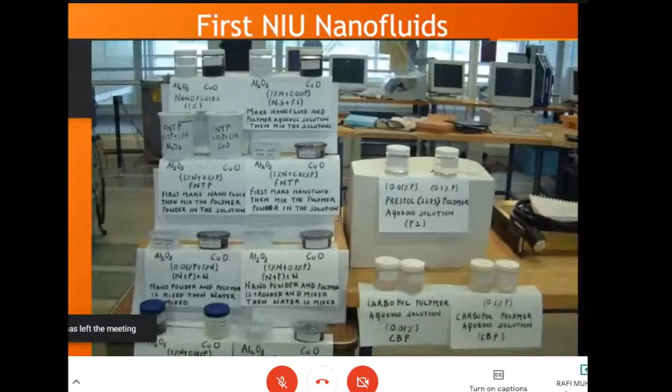This is what we are going to predict in subsequent slides. Initially we started introducing Al2O3 with copper oxides, then we started using silver particles, and later we are using Al2O3 with water, or copper oxide, or silver particles too.

But because of the existence of carbon nanoparticles, it is also mandatory to investigate the nanostructures, whether they behave differently, indifferently, favorably or detrimentally, favoring all thermophysical and thermochemical properties, if you are in a position to use advanced experimental techniques like gas chromatography and other flow visualization methods.

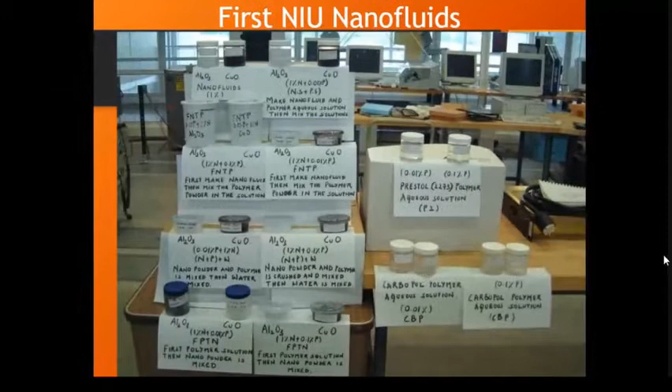If you are relying on knowledge-based expert systems using StarCD or advanced versions of StarCD CFD software, coupled with ES-ICE and ES-Aero, there is a basic prediction that we are always interested in predicting incompressible flow to some extent.

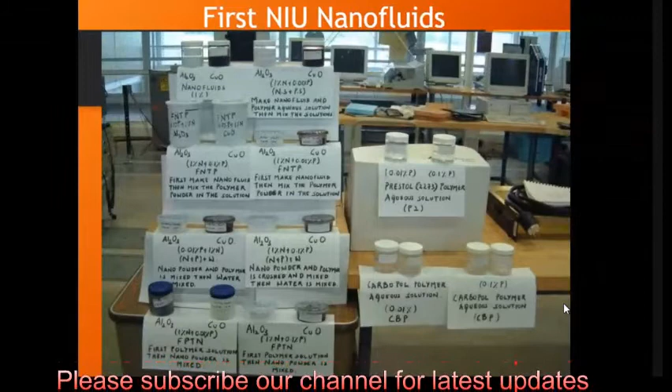But whenever we are talking about fluids, naturally, up to some extent, we are also in a position to rely on features under fluid dynamic simulation of compressible fluid structures also, because of the cycle-to-cycle variation in all the minimal stages when mixing it, as well as with respect to a small void percentage or volume fraction in which we introduce the enhancement of heat transfer through thermophysical and thermochemical properties.

So this is the background in which we are always looking for enhancement of heat transfer for cooling applications. For example, thermochemical and thermophysical changes required to accumulate certain features of intention towards thermal engineering of electronic cooling of electronic equipment, it plays a vital role as far as nanofluids are concerned.

As far as the present scenario is concerned, globally speaking, the trends towards using carbon nanotubes and nanofluids for heat transfer and fluid flow structures are totally deviated by using hybrid nanofluids, as well as empirical oriented, system oriented, material oriented, or phase oriented hybrid nanofluid structures, which are favoring the basic enhancement of the

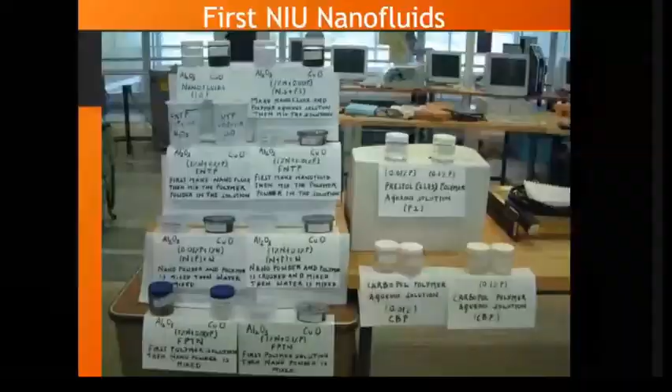To start with the technologies involved in nanofluids, we have two different technologies: one is dry nanotechnology and the other is wet nanotechnology. Since gases and fluids are considered different forms of fluids, naturally we mix them with solids, either through nature on its own, because of natural phenomena ensuring sustainable development towards ecological dynamics and ecological factors.

This also involves chemical and biochemical changes in terms of biomechanical processing and microelectromechanical systems through industrial advancements. One flexible advantage of these nanotechnologies is that we can implement more degrees of freedom with more opportunities. But whenever we look for more opportunities with nanofluids, we also need to look at the more challenges involved.

Basically, nanofluids comprise nanoparticles in base fluids, which help us understand nanoscale particle-fluid interactions in physical, chemical, thermal, thermophysical, thermochemical, and biomechanical processes, and to some extent engineering applied mechanics, as far as material behavior patterns are concerned in terms of creep, stress, and fatigue, using CFD software along with SolidWorks or ANSYS latest versions.

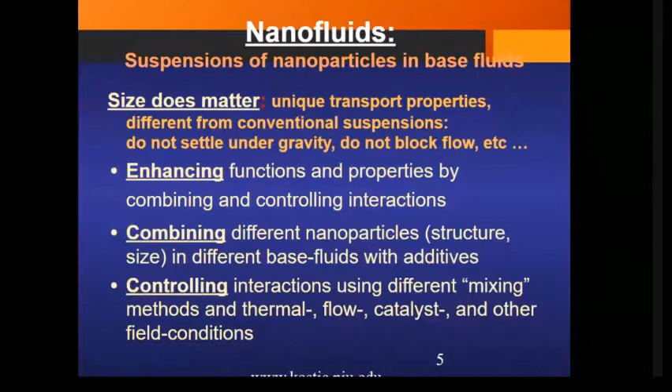finally we are also in a position to control the interactions using different mixing methods and thermal flow structure, and again by using different types of flow conditions too in the field.

So now let us have a basic look on the applications of nanofluids, advanced as well as hybrid nanofluids. Heat transfer of nanofluids in the tribological area, then coating, then chemical processing industries, then pharmaceutical industries, drug delivery systems, telemedicine industry, then extraction of nanofluid-based industries, then environmental pollution.

As far as the present scenario is concerned, at multinational level, they started originating their march fast towards the ecological dynamics and sustainable developments too, because of the existence of using the advanced nanofluid structure in hybrid form.

In the biochemical and biomechanical industries, for example, Biocon is one of the Indian-based multinational companies introducing wireless sensor development and communication solutions for mobile applications.

With respect to different apps, we download many advanced materials embedded in laptops or intelligent computers, mobiles, or other advanced computational facilities, including supercomputers.

Finally, we have application-oriented medical telemedicine, drug delivery, and functional tissue-cell interactions, including cryosurgical aspects. As far as present medical scenarios go, nanofluids are significant.

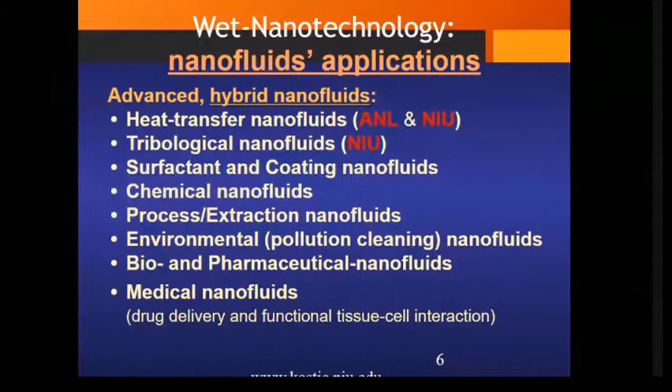It is also associated with basic structures for introducing hybrid nanofluids used in surface-level coating structures. This is what we are trying to convey as far as the basic applications are concerned.

Now, looking at the development of advanced hybrid nanofluids, it is polymeric based—polymer nanofluids, and drag reduction nanofluids, DR nanofluids. So there are two different basic as well as advanced levels of hybrid nanofluids: polymer nanofluids and drag reduction nanofluids.

Development of heat transfer nanofluids normally involves collaboration with many international forums, and many proposals have already been proposed. My experience with the Ethiopian Ministry of Education related to nanofluids is plenty, in terms of polymeric based nanofluids using polymer matrix materials.

PMC withstands very high temperatures. So instead of using metal matrix composites (MMC), we can always go for PMC for basic nanofluid applications requiring high temperature resistance.

Now let us see some of the background. There is a need for advanced prediction of flow, heat transfer fluids, and other critical applications, since it originates from a different blend of different properties.

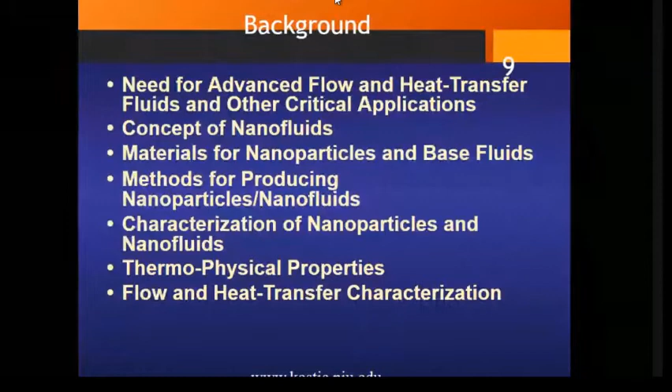As far as flow and heat transfer characterization is concerned, we deal with incompressible, compressible, with heat generation, without heat generation, steady and unsteady conditions, with respect to isotropic and polymorphism-oriented prediction of all structures.

Now let us look at the challenges. Heat rejection requirements are continually increasing due to the trend towards rapid speeds and smaller features for microelectronic devices. Microelectromechanical systems are rapidly developing in optoelectronics as well as microelectronics to predict optical characteristics.

So if you look at any material, basically three different characterizations evolve from the basic characterization. Out of these characteristics, properties like physical, chemical, and thermal properties can be predicted by using basic experimentation.

But if you look at the advanced level of fluid flow structures, including compressible flow structures, as well as the advanced combination mode of conduction and convection, with respect to nominal changes and very minor or less size of particles, it's very difficult to design microelectronic devices.

These devices are already embedded in all computational equipment like laptops, mobiles, and supercomputing equipment. So the cooling process is considered mandatory, and top priority is given to cooling in thermal management of electronic equipment.

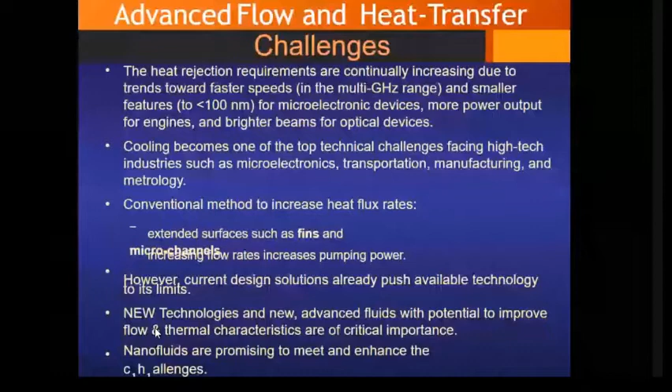New technologies are embedded with machine learning and artificial intelligence for code coupling with respect to basic software. So if you have basic predictions with respect to the concept of nanofluids in terms of predicting the heat transfer of fluids.

Many researchers have come out with miniaturization technologies, but it is predicted that conventional fluids with millimeter or micrometer sized particles do not work with emerging recent trend technologies because they can clog the tiny channels of these devices. So clogging is one of the major difficulties when using microchannels and heat pipes.

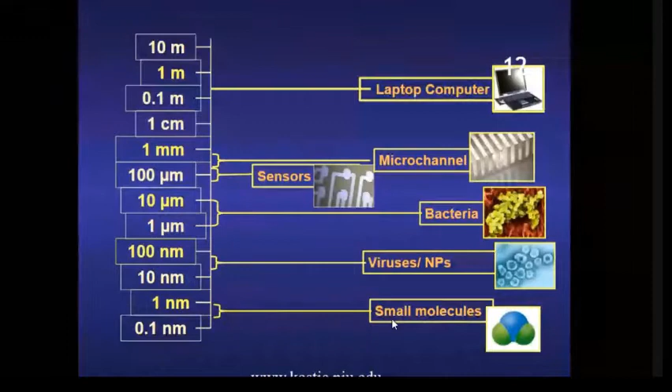Let's have a look at the basic applications for sizing nanoparticles in different sizes. For example, for laptops and computers, the recommended particle size is 10 meter, 1 meter, 0.1 meter, then 1 centimeter too.

For microchannels, the recommended size is relevant because microchannels are always embedded with sensors for actuation purposes in terms of microelectromechanical systems and auto infotronics.

Whenever we talk about sensor development for networking and routing, for communication as well as computer vision techniques, we also have a cluster of nanoparticle sizes like 1 millimeter, 100 micrometer, 10 micrometer, and 1 micrometer. We can relate these sensor ranges to bacteria too, for 10 micrometer and 1 micrometer. For virus, it deals with 100 nanometer and 10 nanometer, and for small molecules, we have 1 nanometer and 0.1 nanometer.

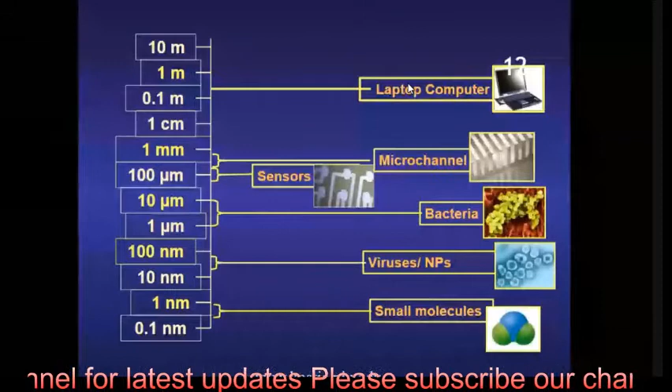So from where the N starts, from 100 nm, 10 nm, 1 nm, and 0.1 nm. We must be conscious enough to have a recommended size of nanoparticles in different recommendable forms, along with the nominal percentage of basic fluid flow, basic base fluid combination.

Now let us see what are the reasons to use the nanoparticles. The basic concept of mixing the solid particles in fluid is for enhancing the thermal conductivity, and it can be traced back to Maxwell in the 19th century. After that we started coupling the suspensions with a very nominal percentage, so that we are able to cling on the critical heat flux in terms of convection.

As far as advanced level of hybrid nanofluids are concerned, the rate of exhibiting advanced heat transfer enhancement is only based on free or forced convection more than 75 percentage, and less than 25 percentage we can cling on the combination mode of conduction heat transfer, again by assuming that it is predicted only in X or Y alone, or X and Y only up to some extent.

For if you have a code coupling with different methods, forward difference and backward difference, as well as the process of CFD is concerned.

So automatically, nanofluids are basically exhibiting fluid flow structures and advancements of heat transfer. Naturally, characterization of materials is mandatory as far as fluid dynamic simulation studies of the basic nanofluid structures are concerned, starting from the first level to the last level. So stage 1 is talking about defining the problem with suitable boundary conditions.

Dirichlet or the combinational mode of Neumann condition can also be coupled with defining the problem, and for nanofluids and advancement of heat transfer is concerned, especially.

Secondly, as far as processing stages are concerned, we can very well go ahead with nanofluid CFD analysis with the help of finite difference method for pure prediction of temperature or heat transfer alone, by using forward difference, backward difference, and central difference, to a particular application, up to some extent.

Secondly, we can use for both predicting the fluid flow structures as well as the heat transfer aspects, the finite volume method. It is a combination of both, taking care of the changes in fluid flow structures, incompressible and compressible, as well as the combination of conduction and convection mode. So by using finite volume method, the processing stage will be easier.

Then again, if any particulate matter or particle structures are very difficult to identify in terms of the basic terminologies of thermophysical, thermochemical, thermomechanical, and thermo processing related parameters, then you can go for the finite particle method. This is one of the recent trends in which you can extend even CFD analysis to many structures.

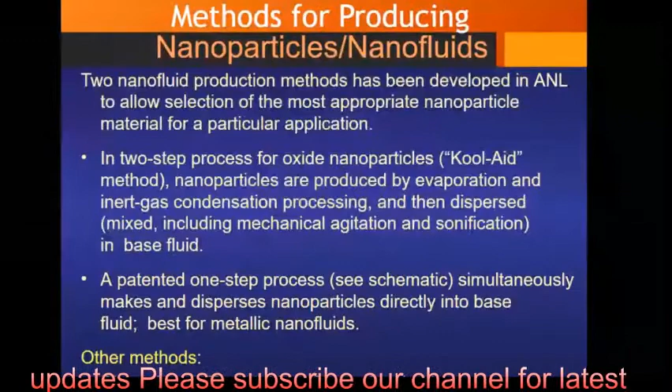Since we are having the dispersion rate, it is very essential to have the prediction of mixing ability towards prediction of the deformational capabilities of the material characterization for sustainable development, which favors the thermochemical and thermophysical behaviors in the preliminary stage for monitoring and controlling the system.

But for executing and prediction, we need to look more into thermomechanical and thermo-optical issues too, because optical characteristics relate to miniaturization, as electronic components are not like mechanical components which are comparatively huge in size. Electronic components are minimal in size due to advanced microchannels, heat pipes, sensors and actuators embedded in auto infotronic systems, from costlier automotive vehicles and aircraft like the 737 MAX and Airbus, to advanced aerodynamic structures and miniaturized components used in satellite communications, rocket engines, space applications and shuttles.

So probably we are looking for the processing advancements in one stage, manufacturing difficulties on the other side, characterization probabilities on a third side, and finally we are going to have a look on the optimization in the other stage.

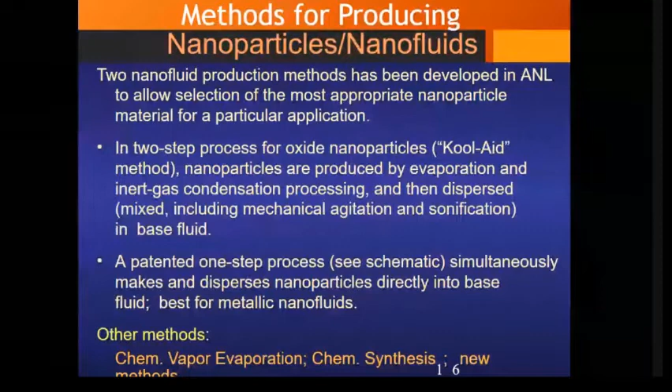So whenever we are talking about the advancements of nanofluids in terms of fluid structures, we need to look at what capabilities need to be embedded, performed, adjusted, or supported with advancements in technologies coupled with basic software and advanced code coupling, to measure it, monitor it, control it, and optimize it.

As well as to propagate the fluctuations as instantaneous changes in velocities - in x direction as u plus u prime, in y direction as v plus v prime, and in z direction as w plus w prime, in all the modulus - so that the code coupling process will be easier for nanofluid CFD and fluid dynamic simulation studies.

So two-step approach processes are very essential for code coupling with CFD as far as nanofluidic structures are concerned, whereas we can always go ahead with one-step process, simultaneously making and dispersing the nanoparticles directly into the base fluid, so that you can have direct contact for predicting the metallic nanofluids.

But bimetallic behavior, because of the existence of covalent bonds and other chemical kinetic structures too, makes it also very essential to have the dissociation of the particles.

So equipartition of energy, mean free path, and root mean square velocity - all these statistical behaviors of the statistical approach of basic thermodynamic analysis - can also be looked into as far as CFD analysis of nanofluid structures are concerned.

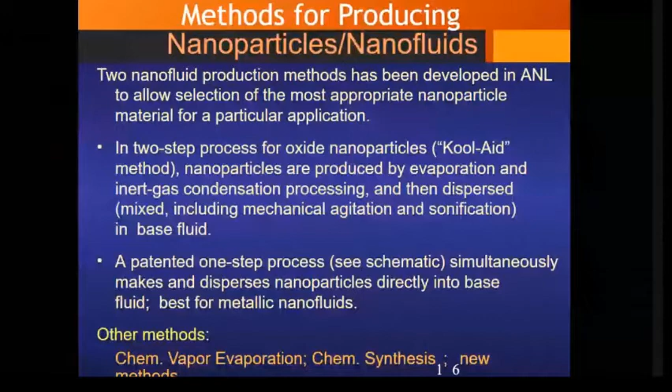And if we have a look at the basic methods, we have chemical vapor evaporation and chemical synthesis. We can go ahead measuring the chemical properties as well as thermal properties too, and we can have idealized as well as real synthesis by introducing new flow visualization methods.

But if you look at the basic terminologies, or the combination of both incompressible and compressible flow structures, we are also in a position to look at aerodynamic structures in terms of different types of turbulence motions like eddies at the large level, higher order level, swirl, squish, tumble, and blow-by, also in the reciprocation motion.

And as far as any chamber - cryo chamber or any fluidic chamber - is concerned, in terms of introducing the nanofluid structure, which is already associated with embedding the molecules in terms of evaporation or condensation, either for heat transfer enhancement for cooling 90%, or it can also be extended for different types of structures.

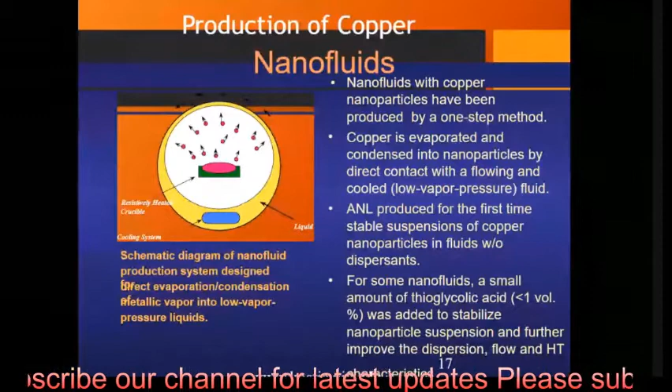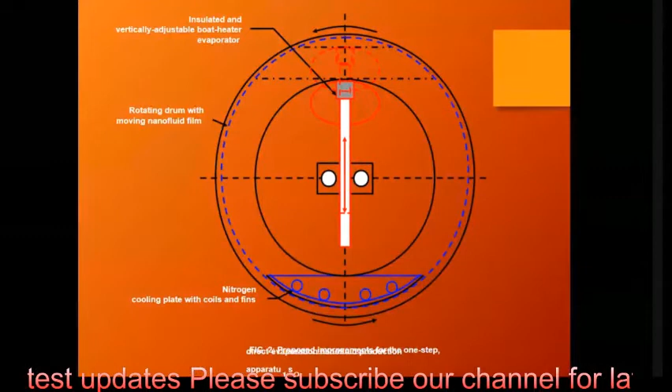Because of the chemical vapor deposition and the fluid structure of turbulence motions, there is a possibility for the formation of heterogeneous mixtures, so we can have complicated structures of compressible flow in terms of eddies and swirl normally—maybe 50% larger eddies and smaller eddies, along with the structure of swirl. And again, we can have a code coupling with the enhancement of convection heat transfer too.

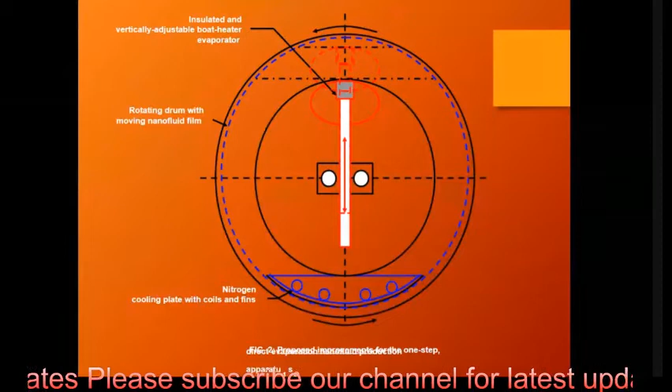As far as heat transfer aspects are concerned, normally conduction mode of heat transfer doesn't require any mediative transfer of heat, since we have direct contact with the solid structure. So we assume heat is transferred through only one direction alone, even though it is happening at three different directions for a multi-directional case.

But still, we need to look at the assumption that we are going to have a critical flux toward only one direction. And since we are going to have nanofluidic structures, as far as convection mode of heat transfer is concerned, we need to assume a medium to transfer the heat, either water or any other fluidic medium—probably because of the existence of the nanoparticles.

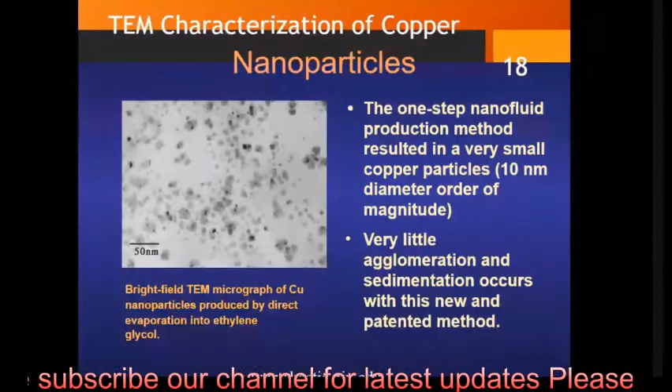And if you look at the dispersion experiment, it shows that a stable suspension of oxide and metallic nanoparticles can be achieved in common basic fluids too.

Next is multi-walled carbon nanotubes in oil. Multi-walled nanotubes were produced in a chemical vapor deposition reactor with xylene as the primary carbon source and ferrocene to provide the catalyst for ionic configuration, ensuring the metallic bonds. It has a mean diameter of approximately 25 nanometers and a length of approximately 50 micrometers, contained in an average of

30 annular layers. As far as layering structures with respect to polymeric corrugated structures are concerned, we need to look at the gravitational studies too, as far as the fluid structures are concerned.

Then nanotube in synthetic oil—nanofluids were produced by a simple one-step method as far as conventional usage is concerned. So stable fluids with carbon nanotubes enhance the thermal conductivity, promising the critical heat transfer.

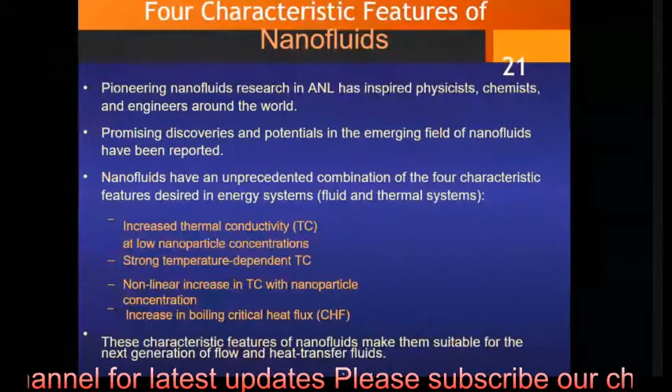That is copper nanoparticles coated with thioglycolic acid.

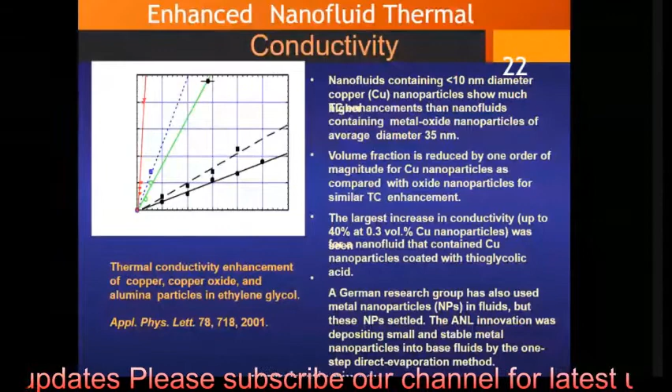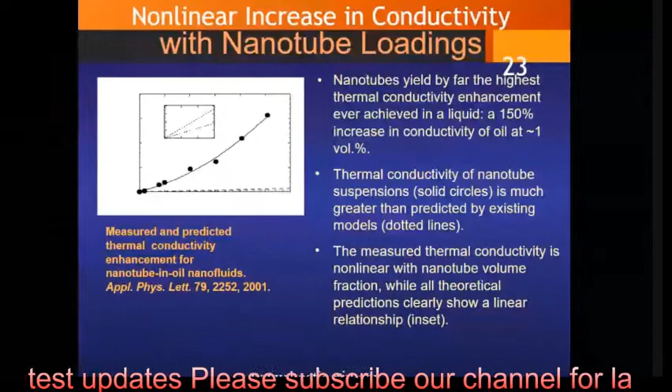So again, we need confinement with proper agreement in predicting the basic fluid structures and boundary conditions, like dynamic or kinematic viscosities. Because of the different fluid structures of oil, it is essential to look at other predictions of fluid properties too, in terms of fixing or ensuring dynamic and kinematic viscosity.

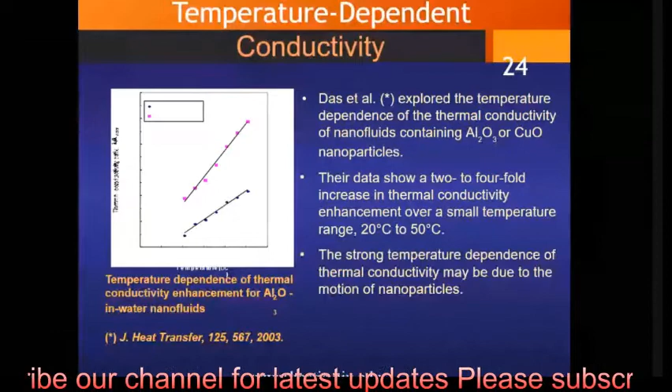The next one is temperature dependent conductivity. It is predicted that the strong temperature dependence of thermal conductivity may be due to the motion of nanoparticles. So a statistical approach of thermodynamic movement of molecules is required as far as these nanofluidic structures are concerned.

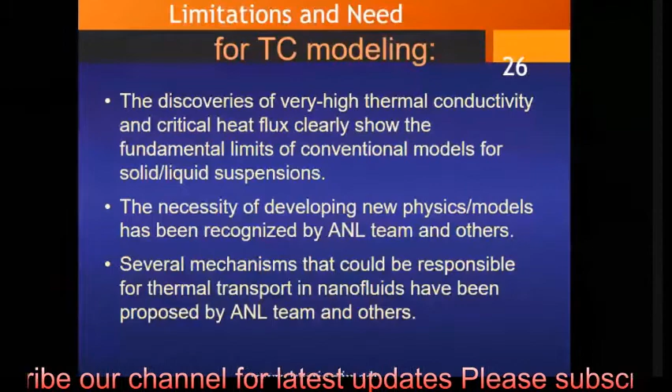Then, limitations and need: the discoveries of very high thermal conductivity and CHF clearly show the fundamental limits of conventional models of solid-liquid suspensions. Therefore, there is a necessity for developing new physics or models recognized by research and development teams globally. Several mechanisms could be responsible for thermal transport in nanofluids, which have been proposed by research teams, and can be predicted in futuristic aspects too.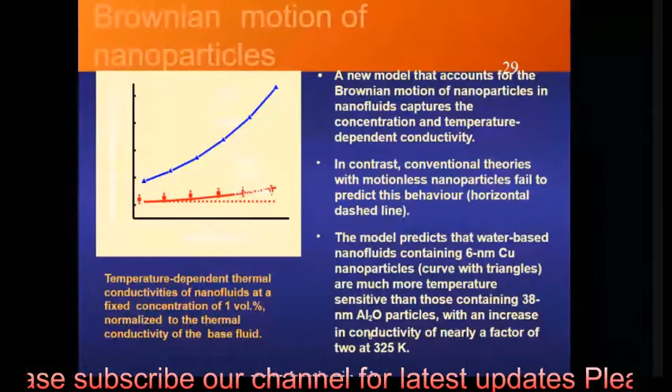The next one is talking about Brownian motion of nanoparticles. A new model that accounts for Brownian motion of nanoparticles in nanofluid represents the concentration and temperature dependent conductivity. This model predicts that water-based nanofluids containing 6 nanometer copper nanoparticles, the curve with triangles, are much more temperature sensitive than those containing 38 nanometer Al2O3 particles, with an increase in conductivity of nearly a factor of 2 at 325 Kelvin.

There's a toughest challenge facing industries like microelectronics, automobiles, and manufacturing sectors, as far as thermal losses are concerned, because we are not able to transfer heat efficiently for cooling systems, especially for electronic supercomputing facilities, electronic equipment, and computer devices. So recent developments in nanotechnology bring out a new heat transfer coolant called nanofluids.

Then preparation of nanofluid: nanoparticles are produced from several methods, we have already discussed the two-step method. It is widely used for preparing nanofluids. Surfactants are substances used to enhance the stability of nanoparticles in the fluid.

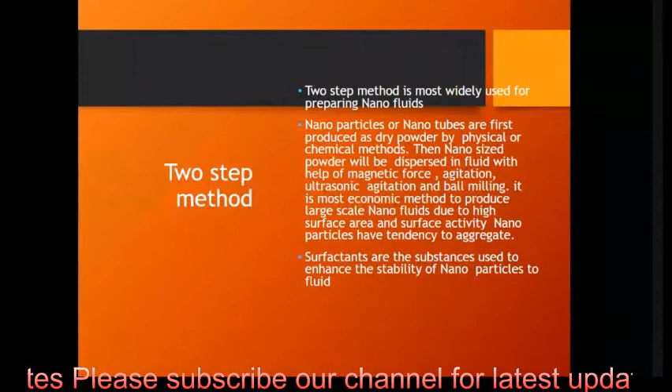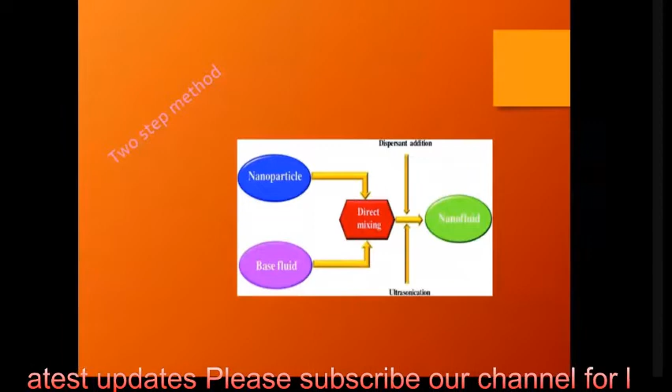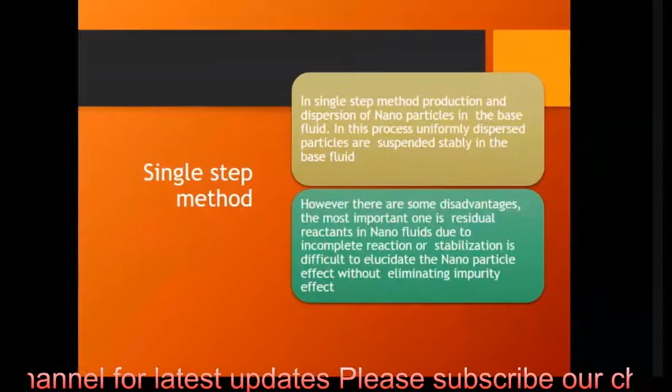In the case of the two-step method, we mix the nanoparticle with the base fluid through direct mixing, with dispersant addition to the basic nanofluids. In the case of the single-step method, it's production and dispersion of nanoparticles in the base fluid directly. In this process, uniformly dispersed particles are suspended predominantly and stably in the base fluid.

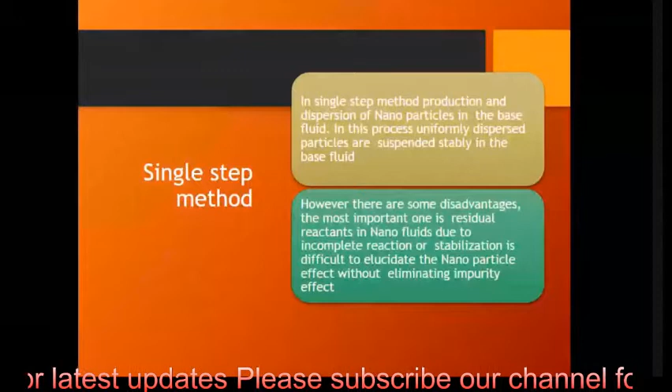In more systems, this is very essential. The residual reactants in nanofluids may result in incomplete reaction, or stabilization is difficult to elucidate the nanoparticle effects without eliminating the impurity effects. That is a drawback of the single-step method.

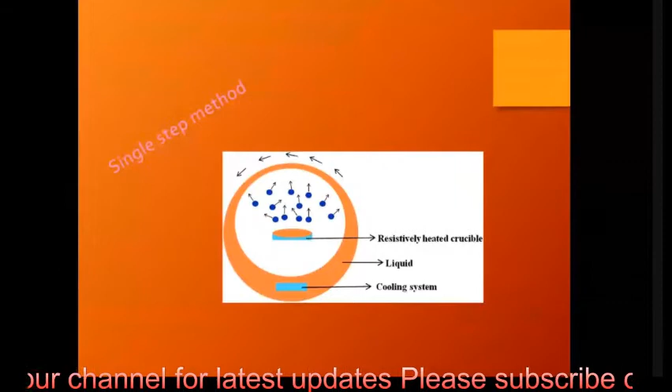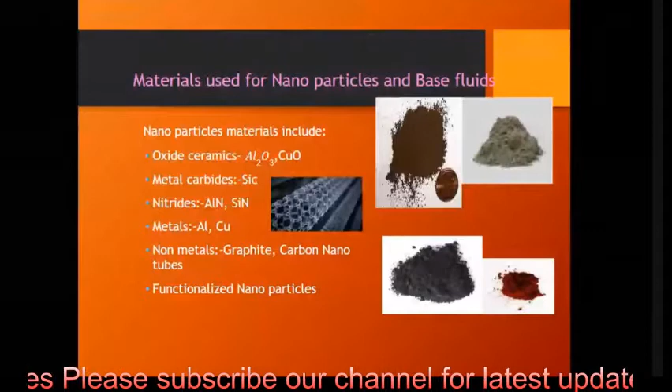There are some basic nanomaterials used for nanoparticles with the base fluid: oxides and ceramics, such as Al2O3 and copper oxide, then metal carbides like silicon carbide, nitrides, metals, non-metals, and functionalized nanoparticles. Base fluids include water, ethylene glycol, triethylene glycol, and other coolants, oils and lubricants, biofluids including cellulose, enzymes, and hormones, used to some extent as a body fluidic structure for telemedicine and surgical applications, especially in advanced cryosurgery. Then polymer solutions and other common fluids too.

There are some advanced flow and heat transfer challenges. Heat rejection requirements are continuously increasing due to trends toward faster speeds. Cooling becomes the most essential challenge in automotive, transportation, and manufacturing sectors, including information technology sectors, because of the existence of fast computing technologies.

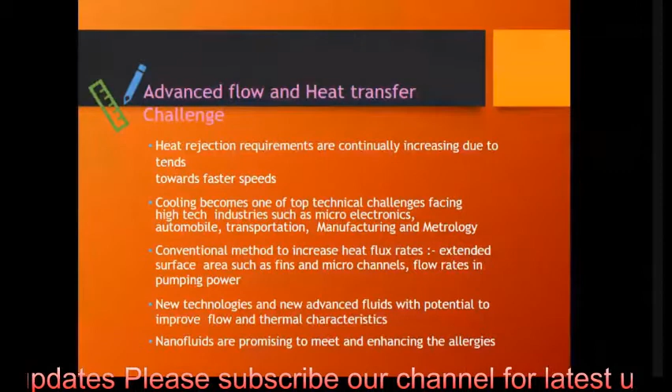Conventional methods to increase heat flux rates include extended surfaces or fins, which can also be used in microchannels, and heat pipes to maintain flow rates in the pumping power of cooling energy. So transportation of heat energy is highly possible to ensure that the cooling rate is feasible for maximizing the enhancement of heat transfer by using nanofluids.

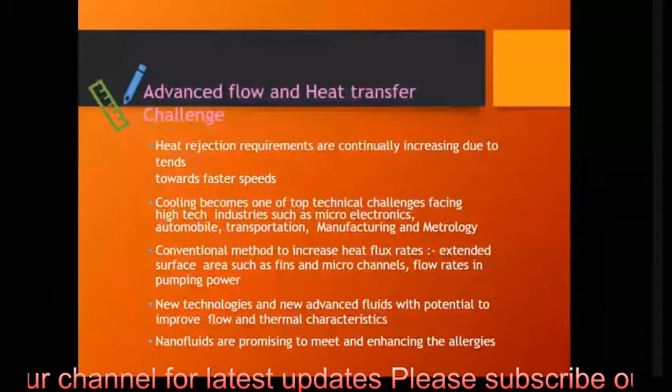So nanofluids are promising to meet and enhance these structures. Conduction for solid nanoparticles, convection for the liquid base fluid — the combination of these two exhibits the advanced law of heat transfer for nanofluids. Of course, the basic concept has already been discussed.

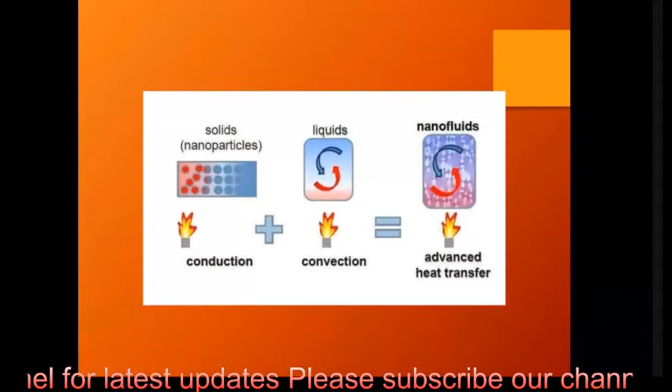Conventional fluids basically contain micro and nano size particles that do not work well with emerging size-reduction technologies, because they can clog the passages of devices. Whereas nanofluids are considered a category of advanced heat transfer fluid, engineered by suspending nanoparticles smaller than 100 nanometers.

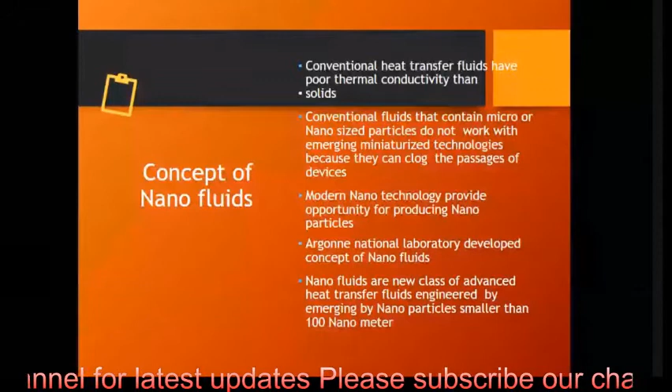Typically they use engine oil, ethylene glycol, water, alumina, silicon, aluminum, copper, silver, and carbon combinations. The thermal conductivity of nanofluids has different influencing criteria for enhancement of heat transfer. Fluids traditionally or conventionally used for heat transfer applications have low thermal conductivity, which raises the demand for production of nanofluids.

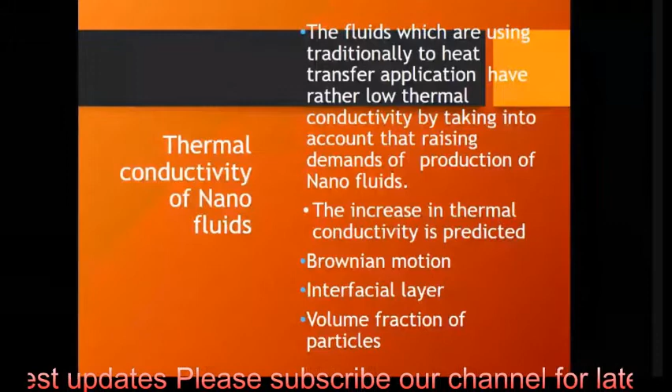As far as Brownian motion is concerned, it's the random motion of particles suspended in a fluid, resulting from their collision with fast-moving molecules in the fluid. We can compare the small element and the larger element criteria for Brownian motion.

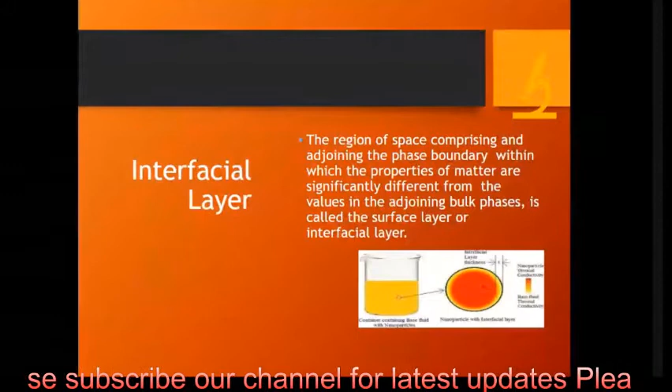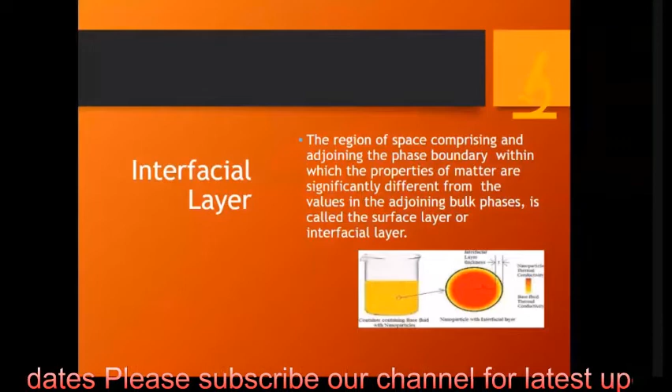Now we can see the interfacial layer influence over the nanofluid structure. The region of space comprising and adjoining the phase boundary, within which the properties of matter are significantly different from the values in the adjoining phases, is called the surface layer or interfacial layer.

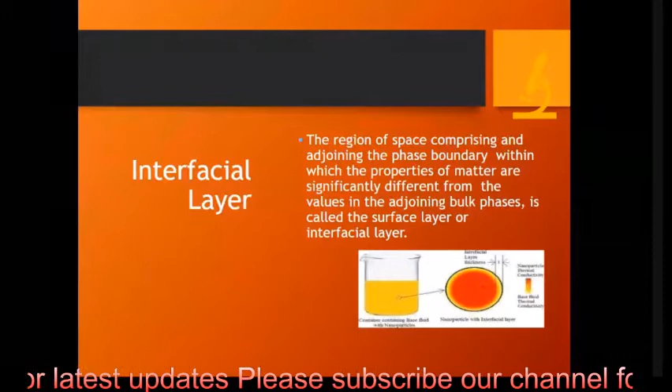This is very essential to predict the mass fraction of the fluidic structure, as far as critical heat in terms of convection mode of heat transfer with respect to a cross section of a layer is concerned. The volume fraction of particles is one of the major factors for the fluidic structure in nanofluids. Since nanofluids are highly conductive, even a very low volume fraction distributed in nanofluids may measurably increase the effective thermal conductivity when compared to the base liquids.

Of course, there are some basic advantages. Due to nanosize particles, pressure drop is minimum. High thermal conductivity will increase the heat transfer rate, and the successful employment of nanofluid will lead to lighter and

smaller heat exchangers, flat plate collectors embedded in compact heat exchangers for low temperature applications, cryo applications, cryo chambers, with the positioning of the flat plate vertically, horizontally, or in an inclined manner, along with banks of tubes.

As far as the basic features of two-phase heat transfer is concerned, it is very essential to predict the nanofluid flow and mixed structures in terms of the advancement of technology, so that we can conclude that a good mixture of nanofluids will give better

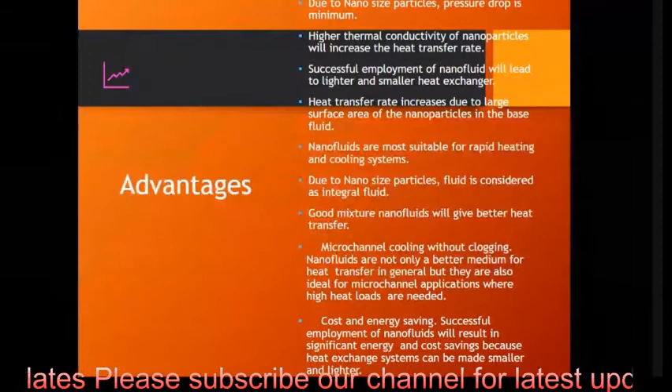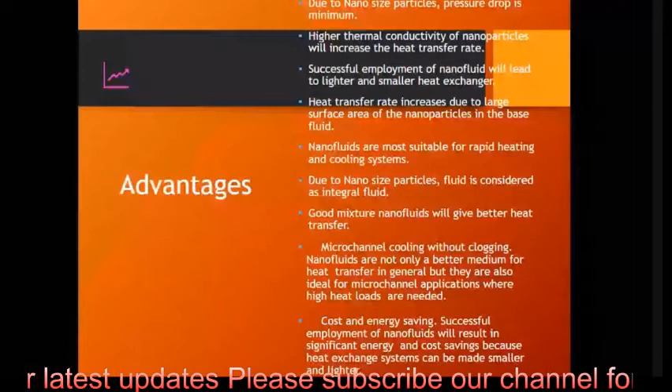heat transfer rates. So microchannel cooling without clogging has to be addressed, since the component is very small in size. Nanofluids are not only a better medium for heat transfer in general, but they are also ideal for microchannel applications where high heat loads are needed.

As far as cost and energy saving is concerned, successful employment of nanofluids results in significant energy and cost saving because heat exchange systems can be made smaller and more efficient.

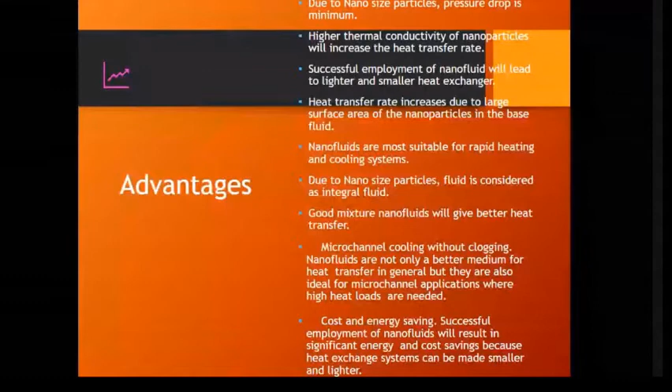Of course, there are some limitations too. Nanofluids are useful in heating or cooling processes for 24 to 36 hours without any chemical treatment, as they are not so stable. They start settling down after 24 hours, which in turn exhibits a main disadvantage.

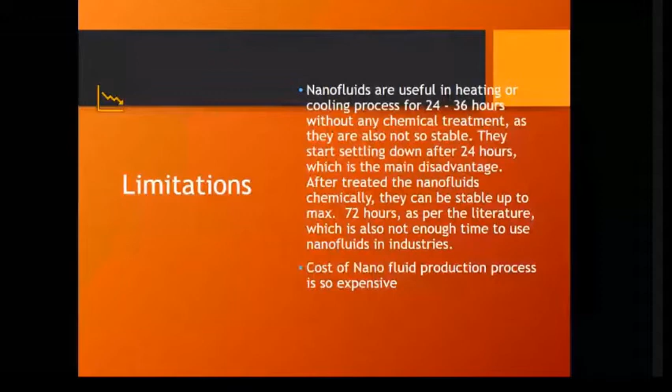After treating the nanofluids chemically, they are expected to be stable up to a maximum of 72 hours as per the literature, which is also not enough time to use nanofluid in industries. So we can say that the cost of the nanofluid process is also very expensive.

Common applications include engine cooling, nuclear cooling systems, cooling of electronic equipment in electronic circuits, advanced refrigeration applications like pulse tube refrigeration and cryo-based refrigeration systems, solar-based waste heat recovery refrigeration systems, and enhancement of heat transfer exchange in compact heat exchangers.

Thermal storage applications, biomedical applications for cryosurgery and complicated surgery by keeping telemetric data for telemedicine through data mining and networking for communications, cooling of microchips, defense and space applications, transportation applications, petroleum industry, inkjet printing techniques, computer vision, and machine vision.

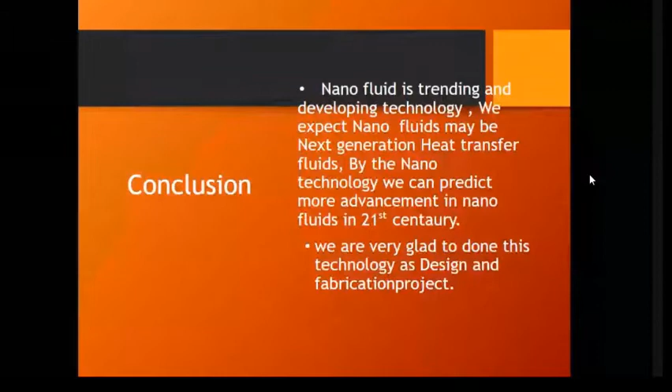intelligent computers. So almost by 2018, we have come out with basic brain predictions. By 2020, it is also predicted and expected to reach 100% of human brain simulation aspects with many neurons and microstructure aspects. So our brain, with the skull as a solid, tissues and muscles as semi-solid, and blood as something like a base fluid.

This brain can be also treated as a nominal as well as pakka nanofluidic system, ready for all the thermomechanical, thermophysical, chemical, as well as thermo-optical structures, as far as futuristic developments are concerned, using nanofluidic flow structures and nanofluidic heat transfer aspects, in 2025, almost like a human brain, just by logging in, clinging on to computerized vision and machine vision aspects through artificial intelligence.

Starting from design of experiments at the first level, genetic algorithm and simulated annealing algorithm at the second level for optimization and multi-objective functions, data analysis and data analytics at the third level, and at the fourth level, using hybrid combinations of multimodal linguistic imaging and capturing, digital image processing through optimal segmentation techniques using different cameras and pixel capacities for imaging forensic issues, in terms of ethical computations with pervasive and cloud computing, for finalizing domains under the cluster of artificial intelligence towards prediction of fluid flow dynamic simulations as far as hybrid nanofluidic structure applications.

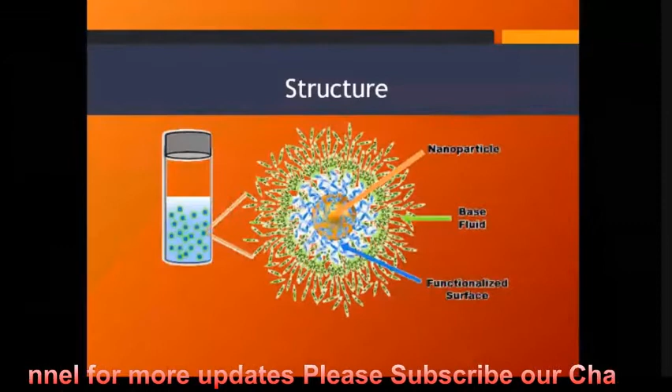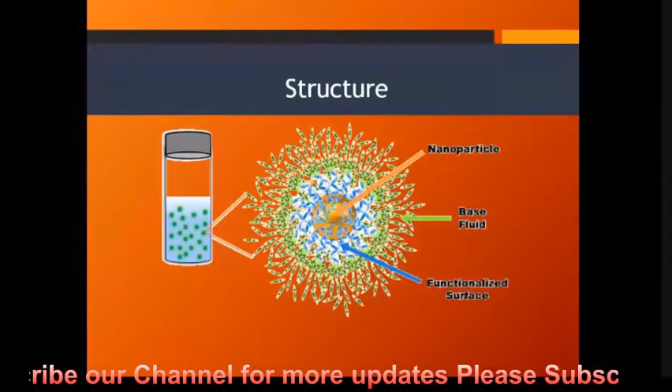That is the way we are going to look at the basic feature advancements in nanofluidic structures. So we are glad to have technology for designing and fabricating the project towards nanoparticles in heat transfer. For example, if you look at our model, three different structures are embedded: one is nanoparticle size, then there's a base fluid and functionalized surface. With this diagram, we can clearly understand the embedded structure of nanofluid advancements in terms of technology, scientific, engineering, and technological advancements in future for predicting the advanced level of nanofluidic structures and different levels of nanofluid heat transfer.

So there are some basic classifications: base fluid, nanoparticles, and surfactants, ceramics, then pure metallics and alloys, and carbon-based. Then features: high heat conduction, stability, reduced chances of erosion, and reduction in pumping power.

There are some mechanisms of heat transfer in nanofluids. Liquid layer in static conditions - layering is one of the very important things. The suggested model predicted up to an 8-fold increase in thermal conductivity of nanofluid, especially when the particle diameter is less than 10 nanometers. Then particle aggregation in the static mode.

It has been indicated that when nanoparticles are suspended in the base fluid, under the effect of van der Waals forces, they agglomerate over time. Because of the existence of the van der Waals force, normally there will be a proportionate complexity between buoyancy forces and van der Waals forces, because we are discussing or mixing it for combinational multimodal predictions. So there are no conclusive theories for the effect of aggregation on thermal properties.

So aggregation is something different from layering. Of course, layering is a very basic nominal thing as far as the characterization mechanism is concerned - it's a basic mechanism, we can go ahead with it. But as far as the particle aggregation system is concerned, this mechanism takes place at constant nanoparticle concentration, and the specific heat of nanofluid with suspended nanoparticles did not change with respect to nanofluid with aggregated nanoparticles, but its diffusivity and thermal conductivity will increase.

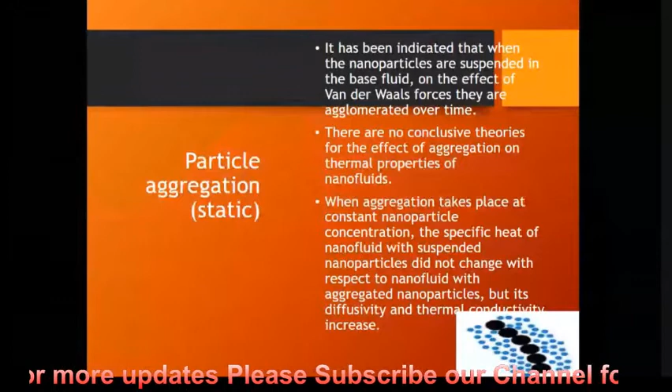Of course, we have already covered Brownian particle diffusion also in the dynamic stage. So we have static stage and dynamic stage in the aggregating as well as layering stages, for static and dynamic.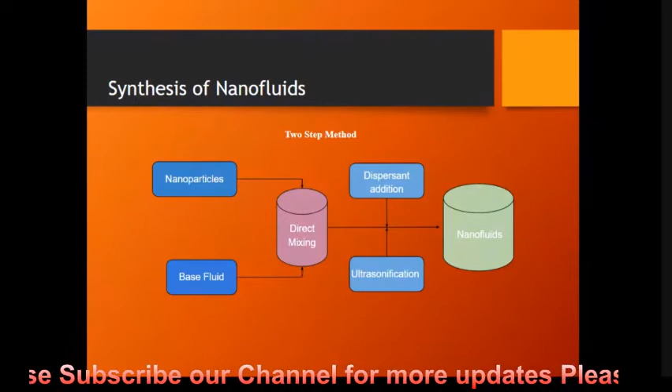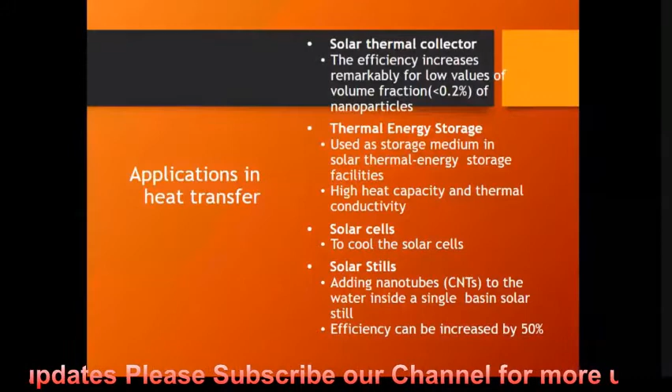Then synthesis of nanofluids - one of the very important steps, using two-step and single-step methods. Synthesis by using nanoparticles in the base fluid, direct mixing, and we have ultrasonification and dispersant addition so that you can get a nanofluid, using the two step method. Then applications in heat transfer: solar thermal collectors, thermal energy storage, solar cells, and solar stills also by adding carbon nanotubes.

Some of the industries like Cisco and Mitchell Enterprises, as well as Tata Steel, have already collaborated with almost all the European countries, including Canada and UK. They have come out with different newer materials in terms of hybrid nanofluids with polymeric structures.

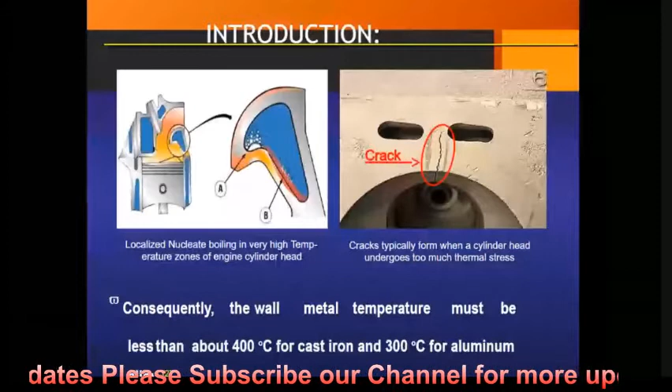Conventional methods to increase the heat flux rates of traditional coolant fluids involve chemical additives, extended surfaces, pin fins or fins, which increase the flow rates. These conventional methods have already been utilized to their maximum potential due to their limitations.

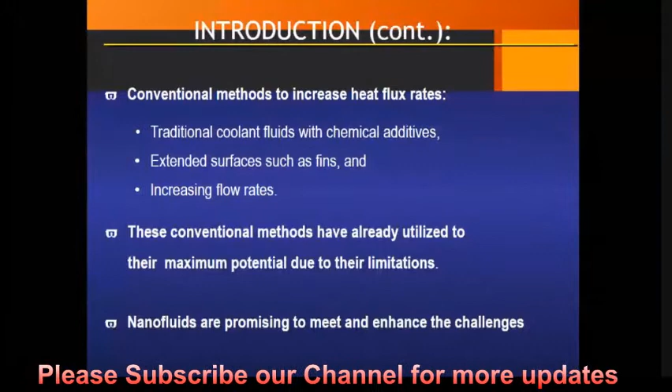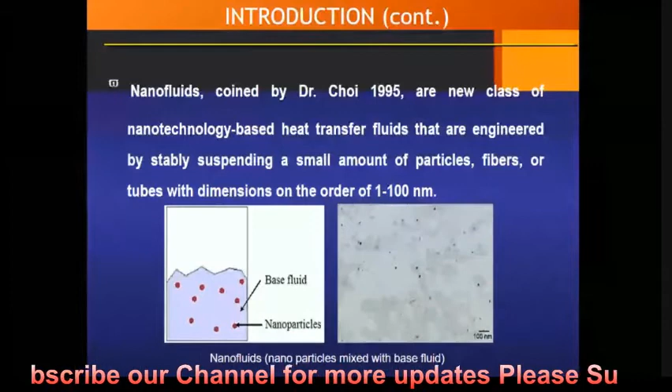Nanofluids are promising for the future to meet and enhance these challenges. So some new class technology-based approach, we started using from the inception. The idea is to understand the basic features of boundary layer separation, then Prandtl mixing length concepts and diffusion aspects too. The Prandtl mixing length concept is important to understand along with the required displacement thickness and momentum thickness as far as turbulence predictions are concerned.

One way we are looking for predicting, the other way we are looking for controlling. These two aspects, predicting as well as controlling thermophysical properties, are concerned. Naturally, it has to be embedded with miniaturization techniques through very nominal size components like heat pipes or micro channels, to be streamlined for a particular application so that the effect of temperature can be adjusted to be supportive with minimum effects.

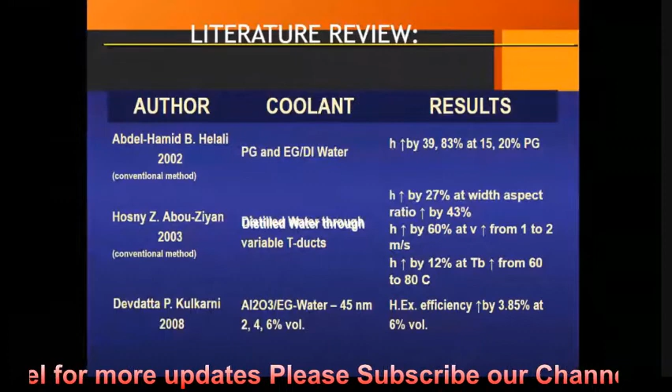We have predicted, if you look at the literature survey from many authors regarding coolants, some results. For the first one, by using water, the convection heat transfer coefficient H is increased by 39 and 83% at 15 and 20% at different levels. If you look at the enhancement of heat transfer in terms of H, we have different values from different authors. Now we can draw a conclusion about the present work stage.

With some objectives also for a simulated case study with relevant operating conditions, we have forced convection and subcooled boiling. Of course, nucleate boiling can also be considered with respect to the vaporization process concerned.

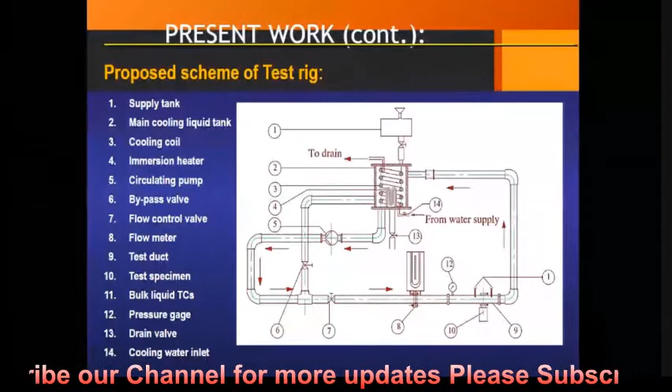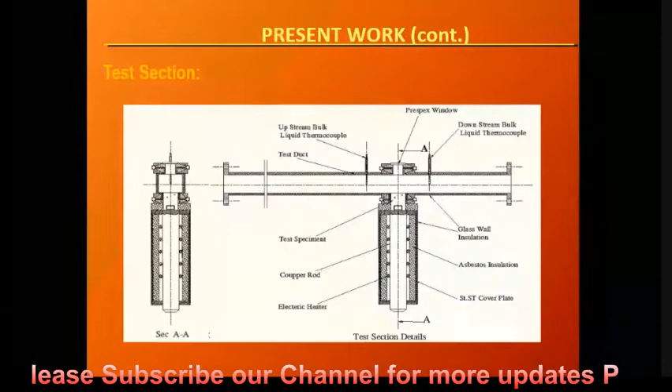And this is a cross-sectional view of the test section, the sectional view of the particular section.

So now let's have a summary for new applications in new technology. Development of methods to manufacture different hybrid nanofluids with polymer additives with exceptionally high thermal conductivity, while at the same time having low viscous friction. High thermal conductivity and low friction are critical design parameters in almost every technology requiring heat transfer fluids, cooling or heating. Another objective will be to develop hybrid nanofluids with enhanced lubricational properties, so there is a necessity to have a mandatory look on the additives, which favor the cooling rate towards sustainable development of nanofluid heat transfer enhancements.

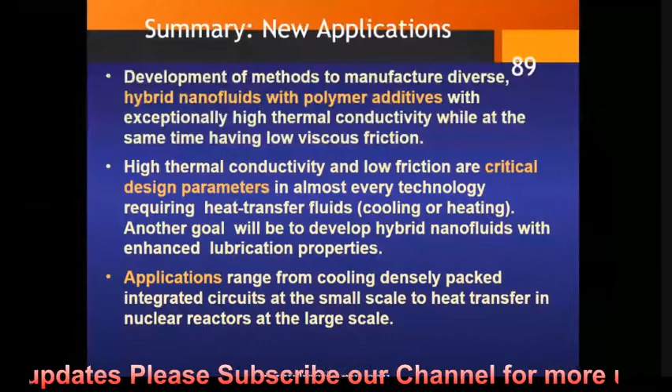Applications range from cooling very densely packed integrated circuits at the small scale to heat transfer in nuclear reactors at large scales.

Nature is full of nanofluids, like blood, a complex biological nanofluid with different nanoparticles accomplishing different functions at the molecular level. That is what I quoted as one simple example: the human body is normally considered as the transport of physical, thermo-chemical, and thermo-optical properties.

So if you take any human body, we have solids as bones, liquids as blood, hormones and enzymes, and semi-solids as minerals, tissues and muscles. This is the best example of nanofluidic structures, and we can transfer heat by introducing different mixing criteria with nominal changes.

So when we take medicine, for example injecting an injection into our body, naturally it comes under the terminology of enhancement of heat transfer through nanofluids, because you are mixing a base fluid with a solid through a needle.

The injection rate, the rate at which it disperses, the rate at which it collides with your blood, the rate at which it reacts with your blood - everything comes into the picture in terms of nanofluidic structures, either incompressible or compressible, with steady or unsteady structure, laminar or turbulent, aerodynamic structures with detachable or attachable, larger and smaller eddies, with different types of turbulence motions, as far as injections are concerned in a human being.

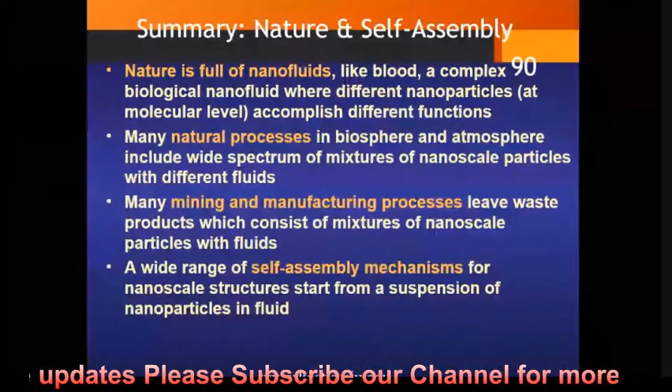So very little is known in terms of thermophysical and thermochemical interactions. Many more things have to be explored to improve thermal conductivity.

Improved theoretical understanding of nanofluid structures will develop many more insights into the different nanoscale structures and dynamics of the fluid, using a variety of scattering methods like small angle X-ray scattering, small angle neutron scattering, X-ray photon correlation spectroscopy, laser-based photon correlation spectroscopy, and static light scattering, along with computer-based models using advanced costlier technologies.

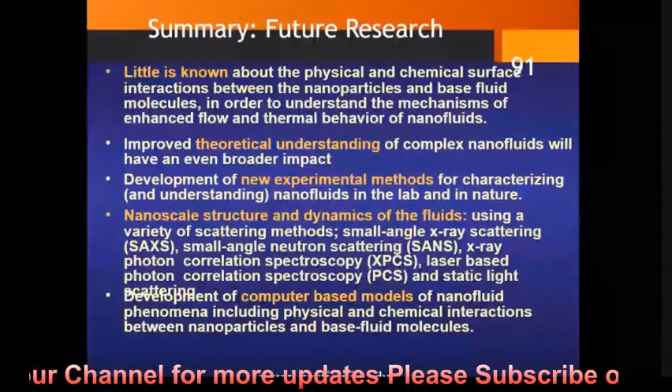So if there is any query, I am very much interested to address your queries up to some extent, as we have come across different scenarios and applications with combined project work at the level of different countries.

So to the best of my knowledge, I have covered starting from the basics to the intermediate stage in the middle era, as well as the latest stage up to 2025, for enhancing the artificial intelligence aspects towards nanofluidic structures and heat transfer. I tried my level best to capture the basic ideologies, starting from the basics to the advanced level, as a present summary.